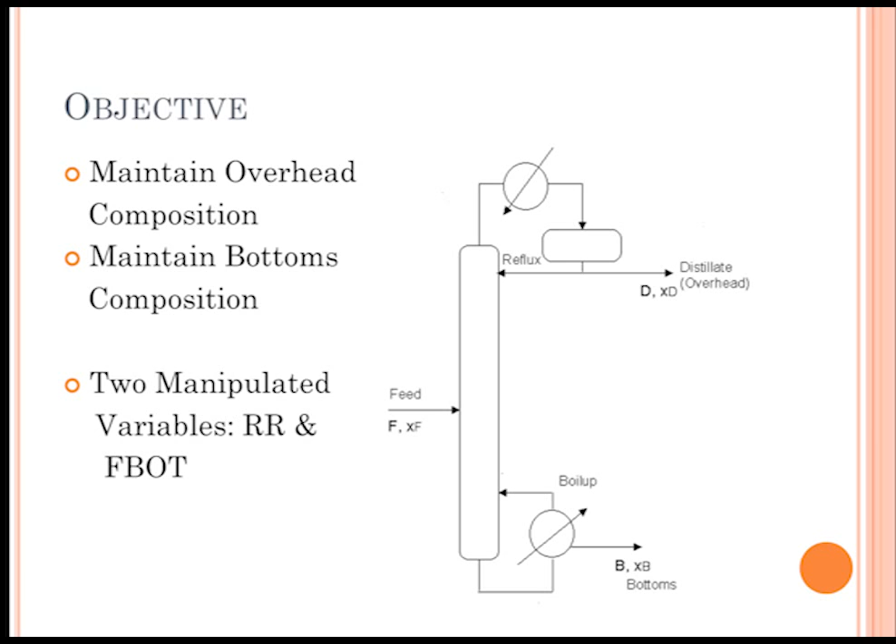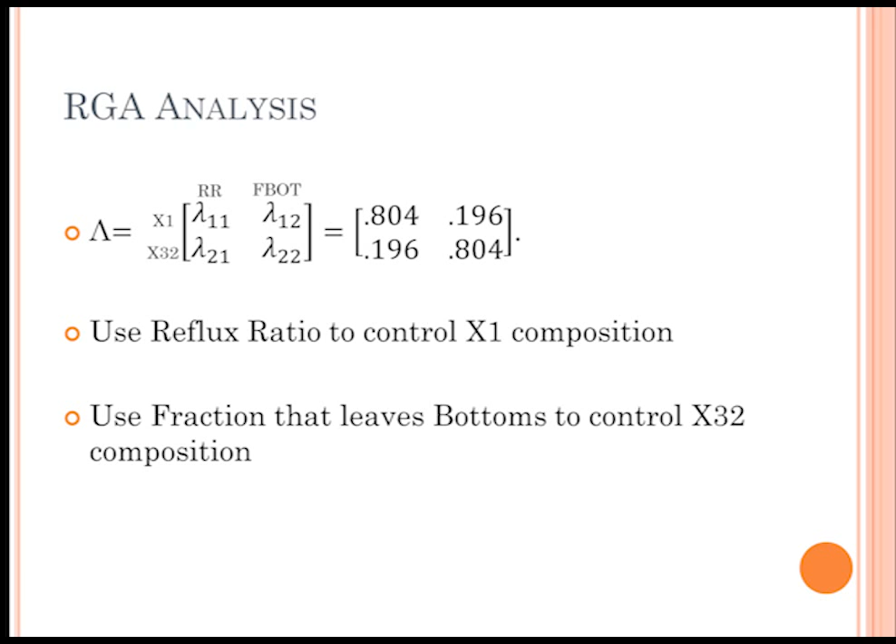So when you have multiple control variables and multiple manipulated variables, sometimes it can be hard to know which ones to pair. So we did a relative gain analysis, which looked at the values of the Ks and calculated values based on those relationships, and we found the main diagonal, where we'd pair the top composition and the reflux ratio, and use the F bottoms to control the bottom composition.

So this model is representing a transient mole balance on tray 17, and as you can see, the trays are counted from top to bottom. So with the feed in, the top is the rectifying section and the bottom is the stripping section. And the five terms here represent the feed coming in, the top liquid flow rate and bottom vapor flow rate, and also the liquid flow rate going out, the top vapor, and then the liquid going in.

And one thing worth noticing is because of the constant molar overflow assumption, we're able to say all the liquid flow rate and vapor flow rate in the top rectifying section are constant, and we can apply that assumption to each tray with this model and determine the compositions. Eventually we can determine the overhead and the bottom compositions. Okay. So we're just going to jump to the results.

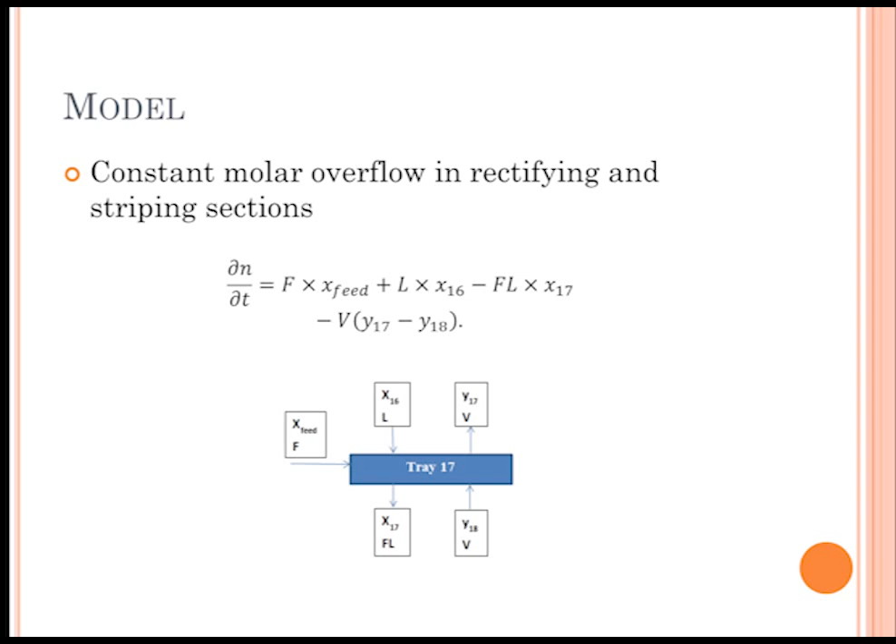We use the MATLAB structure because it has the energy and material balances built into it to run 4 different types of controllers. So this graph here, we have our set point in the dotted lines that it's trying to control to. The blue line is just a PID controller. You can see that there's pretty poor performance controlling to the set point. The yellow is an interacting PID controller where you try to decouple the control variables and manipulated variables, and you can see it's better than the PID.

The orange is the nonlinear controller, and then we noticed that in the PID interacting controller, the main fluctuations came when there was a disturbance in the feed mole fraction here in the middle of the graph, and so we added a second feed forward component to our PID interacting controller, which was a static feed forward based on the gains of the disturbance to the feed composition and the top reflux ratio. And so with the interacting and the additional feed forward component for the feed composition, we're able to maintain very, very tight control with very small deviations when there was a change in feed composition.

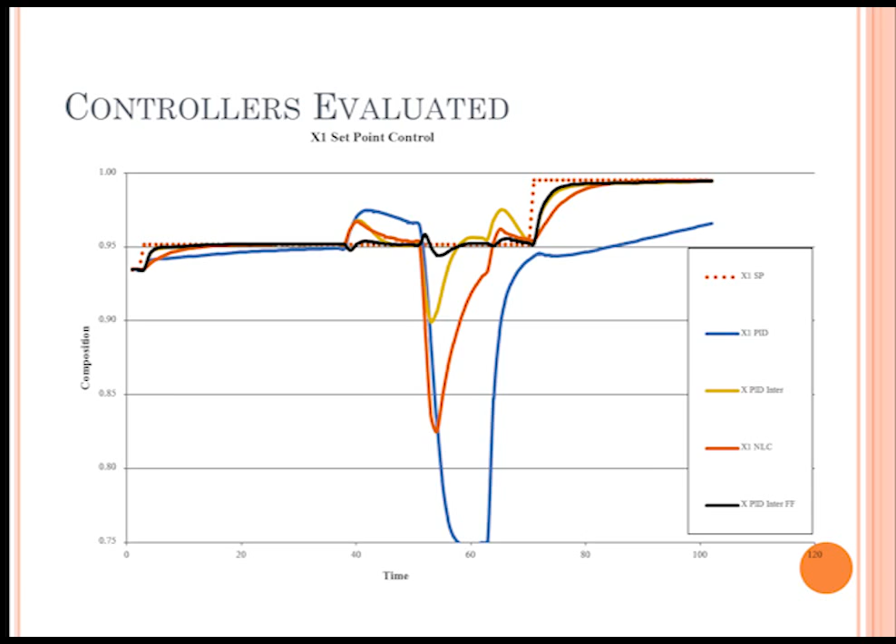Looking at the bottom, there's a little bit different behavior. Again, the PID was the worst, but in this case, the nonlinear controller controlled pretty well. It controlled better than the interacting controller, which is different from the top composition. But still, when we added the static feed forward to the interacting controller, it performed better than the nonlinear controller.

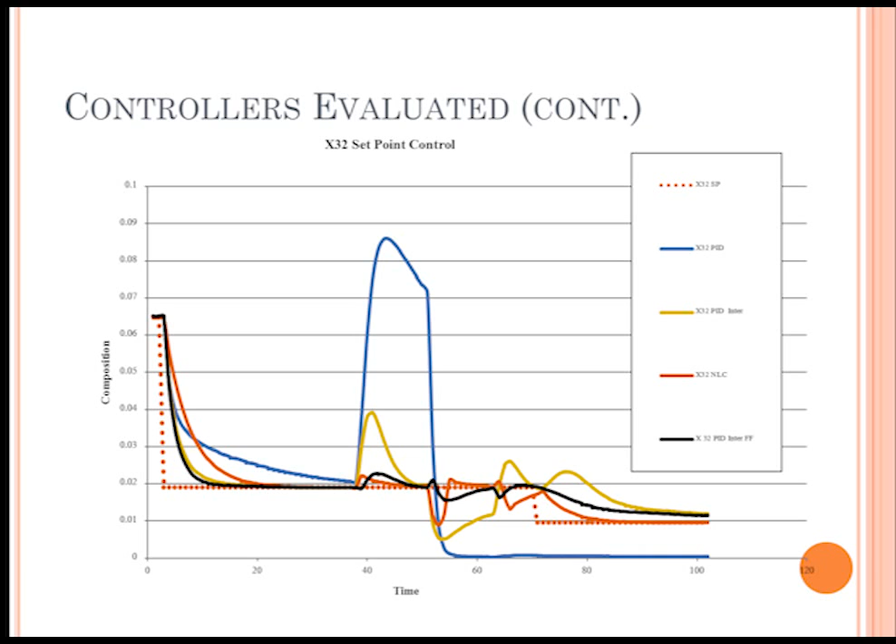So the last slide here shows an integration of the errors over the whole time frame. And so you can see that there's really no comparison for controlling top composition with the PID controllers and feed forward. But on the bottom, the nonlinear controller was somewhat comparable, but it would still be outperformed by adding both those feed forward terms. So our recommendation to the distillation unit is to implement a PID controller with 2 static feed forwards, one for the other controlled variable and one for the feed composition.

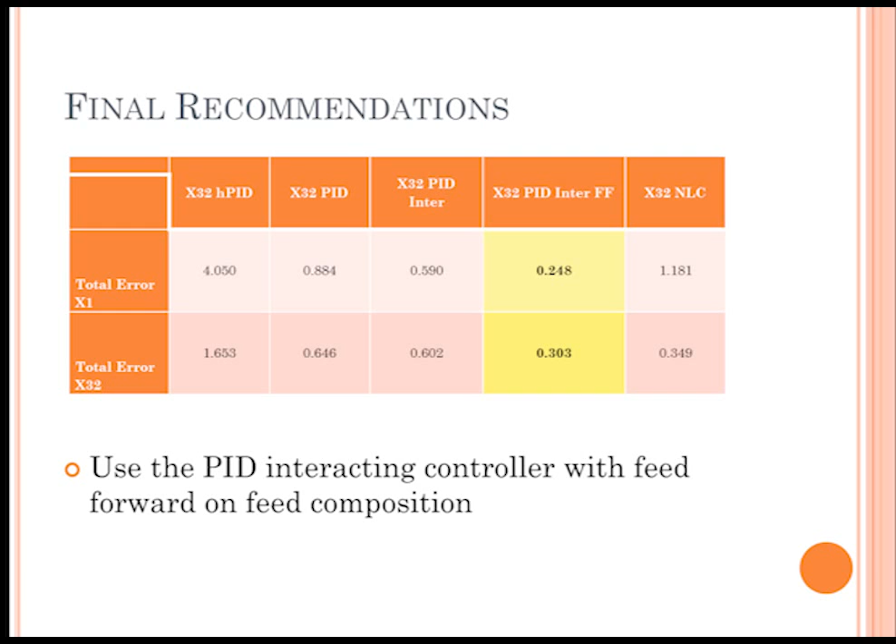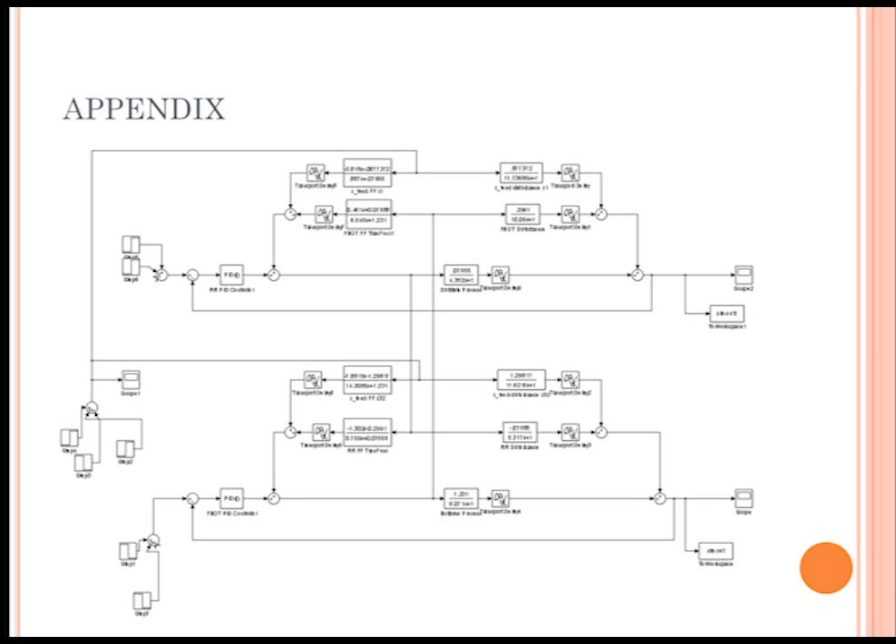Lastly, we just show you this because we spent maybe 20 hours in Simulink trying to model the system. But we realized that we make the assumption that both the process transfer functions and the disturbance transfer functions are first order. And so it's somewhat self-defeating because you're not actually modeling the real system based on the energy and material in the real system. We're using our approximation to also judge the effectiveness of our controller. So it's not that you learn a lot when you model it in Simulink like this. So even though we spent a lot of time, we didn't get a lot of gain from it.

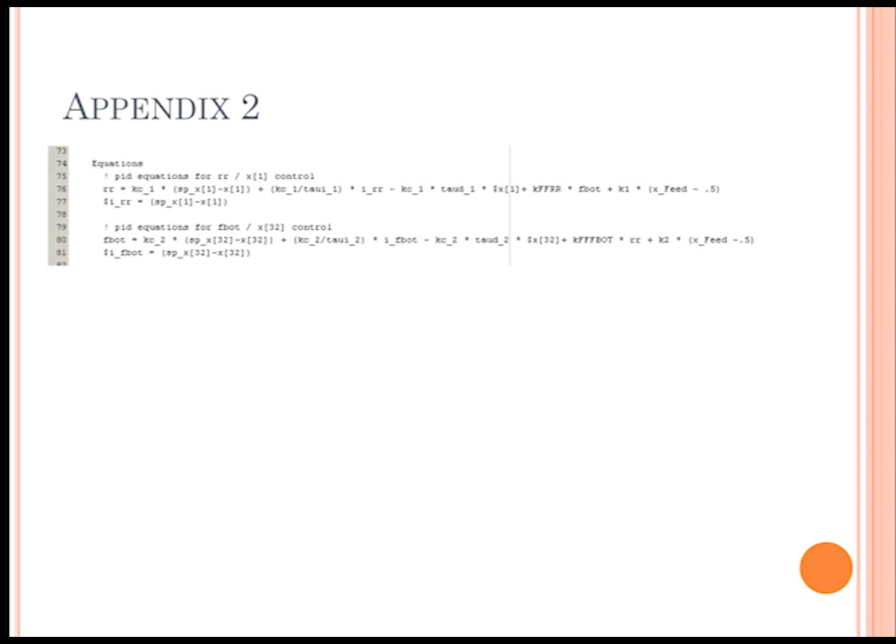And then lastly, this just shows our code in MATLAB where we added our 2 feed-forward controller components. So here's the static feed-forward coefficient times the F-bot, and this is for the reflux ratio. And then we have another static feed-forward coefficient, and then the deviation from the nominal feed condition. And so that seemed to give the best control.